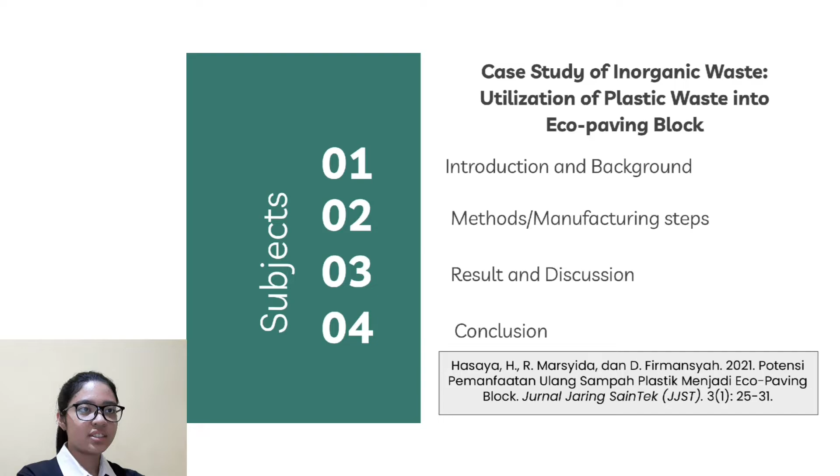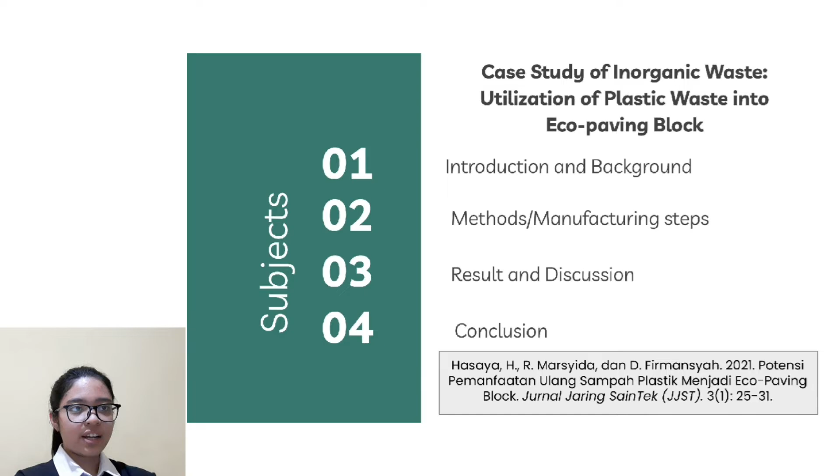The main research we use is an article from Hasaya, Marsyida, and Firmansyah from Jurnal Jaring Saintek (JJST), titled 'Potensi Pemanfaatan Ulang Sampah Plastik Menjadi Eco-Paving Block'.

First, introduction and background. The dominant type of waste in Indonesia is organic trash, leftovers, and leaf litter at 50%, followed by plastics at 15%, and paper at 10%. From this, we know that plastic waste is also a problem in Indonesia.

Moreover, plastic waste has chemical elements with covalent bonds, making it hard to degrade naturally. Plastic waste can also pollute the environment, covering the ground and water, disturbing living creatures including aquatic life, and reducing water and land quality. Indonesia is the second biggest contributor of ocean plastic trash after China.

Next, the low recycling rate of plastic waste. The amount of unmanaged trash in Bekasi Regency, the location of my article's research, reached 700 tons per day, and around 85.67 tons per day for Bekasi City alone.

There is a waste bank in the residential area of Rawalumbu District, Bekasi, which can accommodate various inorganic waste such as plastic cups, styrofoam, cans, food wrappers, and plastic bottles, with a capacity of up to 150 kg per day. However, solving the plastic waste problem requires more than just relying on waste banks.

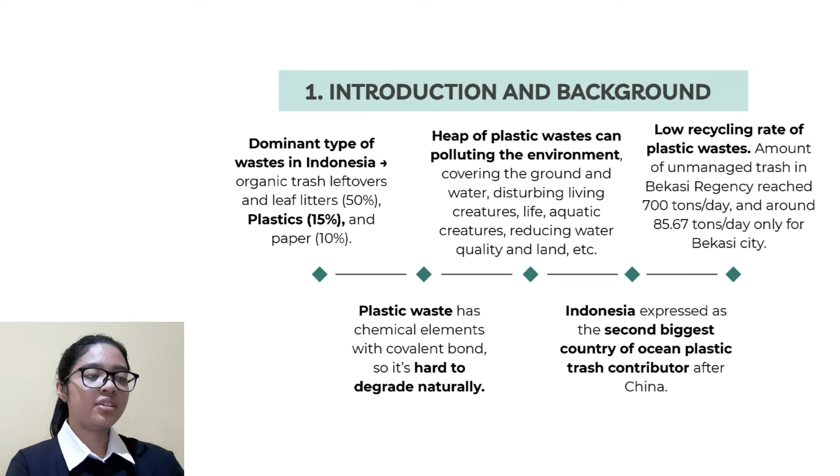Due to that problem, there is an innovation of alternative plastic waste use: plastic waste recycling, turning raw plastic materials into eco-paving block. Eco-paving block is a conblock product, a type of building material used for road pavement with regular dimensions, made of certain types of plastic waste, especially PET or PETE plastic type, polyethylene terephthalate.

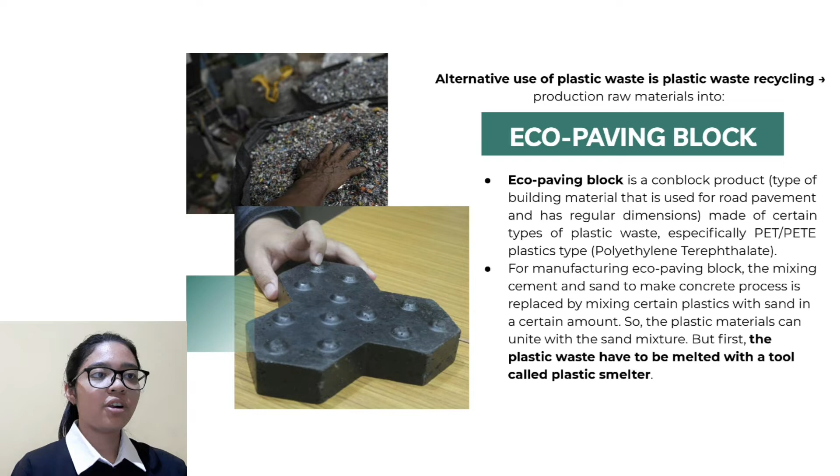For manufacturing eco-paving block, the mixing of cement and sand to make concrete is replaced by mixing certain plastics with sand in a certain amount, so the plastic materials can unite with the sand mixture. But first, the plastic waste has to be melted with a tool called a plastic smelter.

The next subject is methods or manufacturing steps. The method used in this research is experimental, and the stages of making eco-paving block with a plastic smelter are described below. First step: analysis and identification to make eco-paving block. It has material characteristics referring to SNI standards, including high heat resistance up to 250 degrees Celsius.

The second step is initial design, concept, and plastic smelter analysis. A plastic smelter tool is required for melting plastic raw materials. The third step is repair and end design of the plastic smelter.

From the initial design analysis, improvements that may need to be made are determined. The fourth step is component inventory. The components need to be well noted in order to know what is available and what needs to be provided.

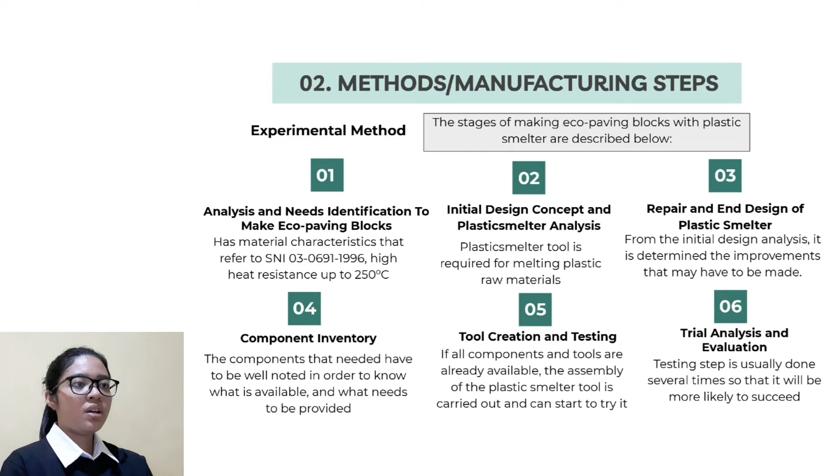The fifth step is tool creation and testing. If all components and tools are already available, assembly of the plastic smelter tool is carried out and testing can begin. The sixth step is trial analysis and evaluation. Testing is usually done several times to increase the chance of success.

The seventh step is the recycling into eco-paving block product manufacturing step. Making eco-paving block is done using a tool called a plastic smelter. The procedures are described as follows.

First, the smelter is connected to electric power, and the thermostat control is positioned at a temperature suitable for the plastic material characteristics to be melted. The second step is to wait for the plastic smelter tool to reach the specified temperature, marked with a green light indicator.

The media used is cooking oil, which is used because it makes the melting process faster and the plastic melts and can easily be reshaped.

The third step: plastic waste is put into a plastic smelter. Observations are made periodically during the melting process to check the texture and consistency of the melting plastic material, which will be used for the final product.

The fourth step: the melted plastic product is mixed with sand and molded into the form of eco-paving block products. The melt is left until it hardens in the mold.

The last step: the eco-paving block is removed from the mold. After that, finishing or final polishing has to be done before using the final product.

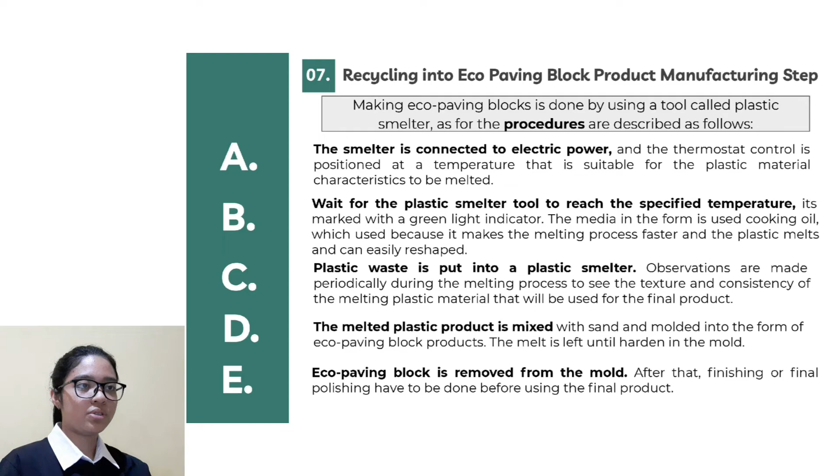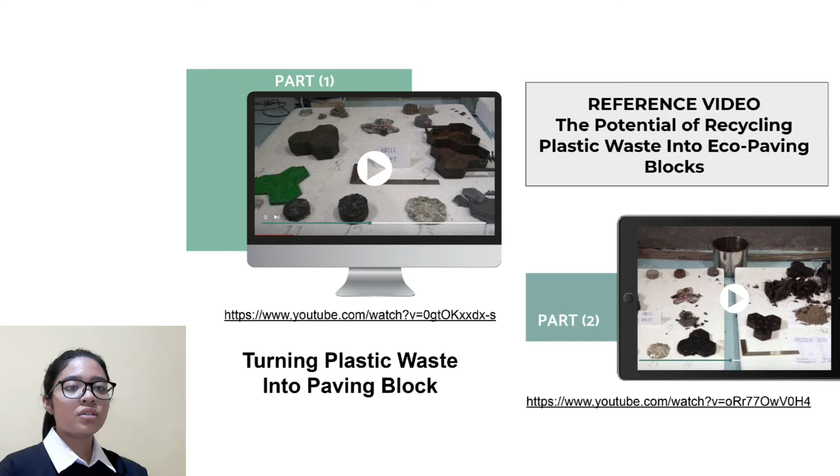Next, I will explain the third part: the results and discussion. The equipment used in processing plastic waste is a plastic smelter.

A plastic smelter is a tool that functions to melt certain types of plastic waste to be recycled into new products, such as flower pots, plastic bricks, blocks, and others.

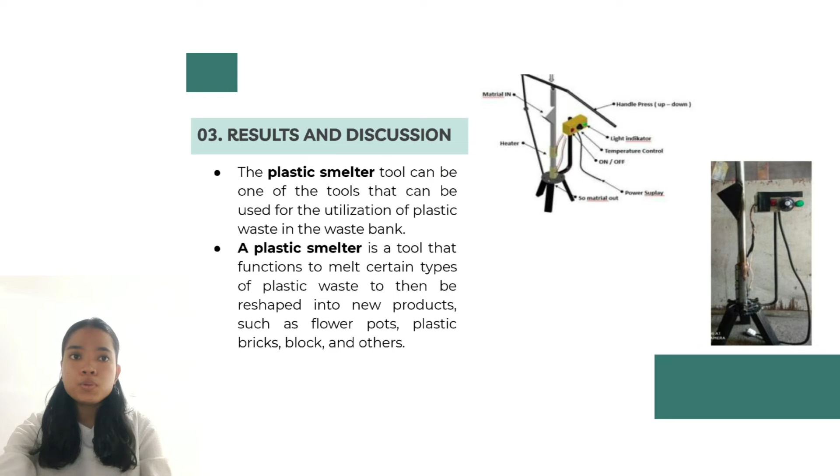Based on Table 1, we can see the type of ABS plastic has the highest boiling point and the longest melting time. In the strength experiment, the use of only PET plastic in a plastic block was more prone to break, so a harder plastic mixture was needed.

ABS plastic is hard and heat resistant, so it takes longer to melt than PET plastic. In addition, ABS plastic tends to have lower adhesion than PET. The use of a combination of PET and ABS plastic types produces a strong and stable plastic mixture with higher adhesion.

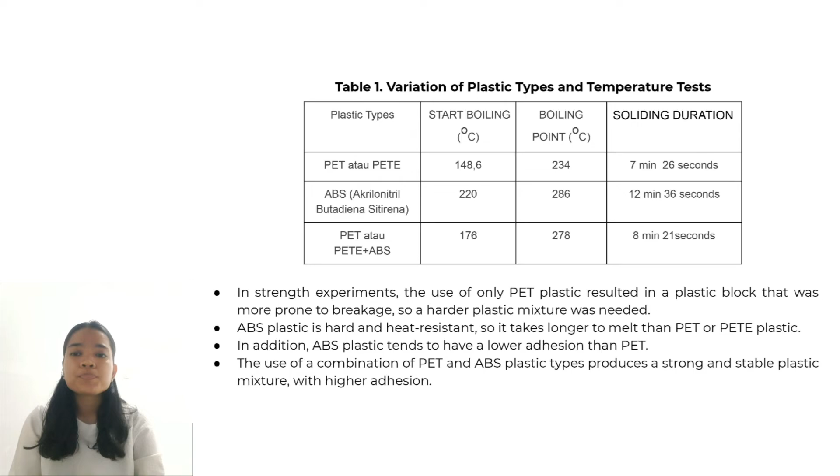Next, the following is a graph of the difference in melting temperature of plastic types. The melting time for the plastic combination is faster than ABS only, and longer than PET only, at 8 minutes 21 seconds.

The time required is also not much different from melting PET alone, with a difference of 55 seconds. For the combination of PET and ABS, the energy required is high, and the time required is quite fast.

Next, further in Figure 2: difference in melting duration of plastic types. In the strength experiment, the use of PET plastic in a plastic block that was more prone to breaking, so a harder plastic mixture was needed.

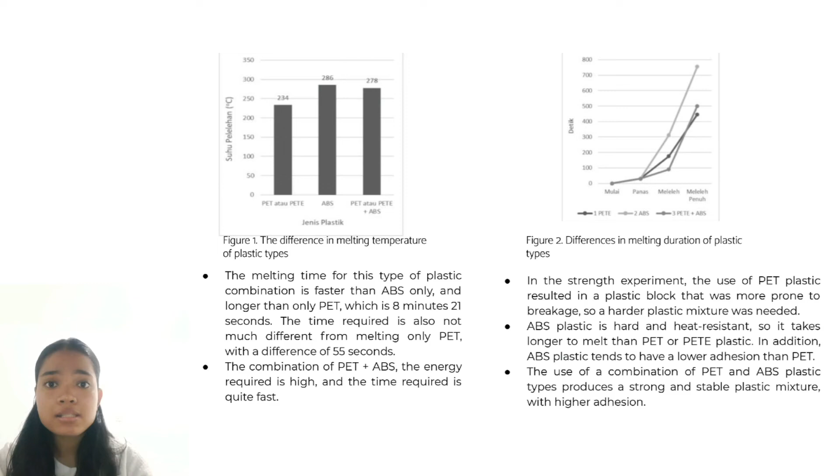ABS plastic is hard and heat resistant, so it takes longer to melt than PET plastic. In addition, ABS plastic tends to have lower adhesion than PET. The use of a combination of PET and ABS plastic types produces a strong and stable plastic mixture with higher adhesion.

Next, here is a picture of the top and side view of the eco-paving block trial. From the test results, the stability of the eco-paving block cannot be tested further.

Based on the results, the PET and ABS plastic types cannot be mixed optimally. There is a tendency for the lighter PET plastic to be at the top of the eco-paving block trials, and the ABS plastic to be at the bottom.

Mixing between these two types of plastic hasn't occurred optimally. The melted plastic must be mixed more thoroughly so that the eco-paving block product can be formed consistently and stably.

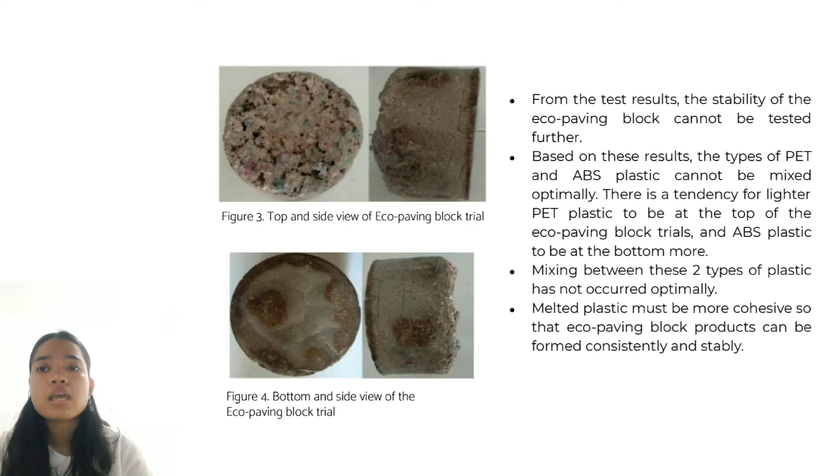Finally, the conclusion that can be drawn from this presentation is that the use of recycled plastic has the potential to make eco-paving blocks.

This product is made by combining PET and ABS plastic waste, making an eco-paving block from a mixture of melted plastic. In order for the plastic to melt, a plastic melter or plastic smelter is needed.

Based on experimental results, compared to using only one type of plastic, only PET or only ABS, the combination of PET and ABS with a melting time of 8 minutes 21 seconds and a required temperature of 278 Celsius produces a plastic melting mixture that has good adhesion and resilience.

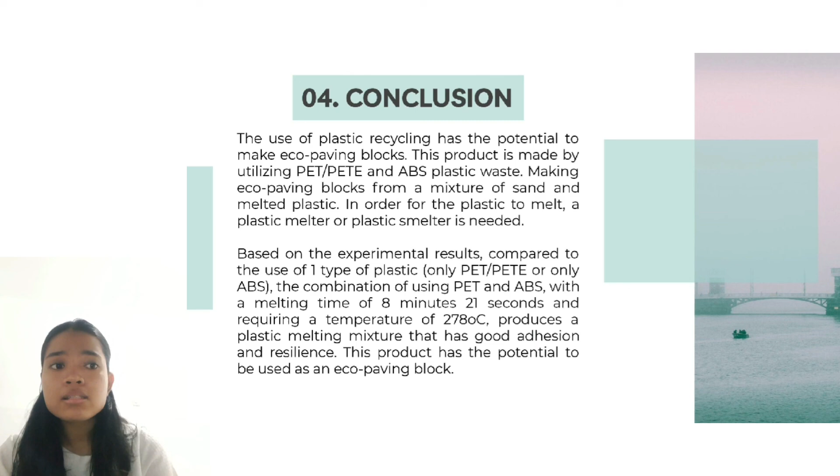This product has the potential to be used as an eco-paving block.